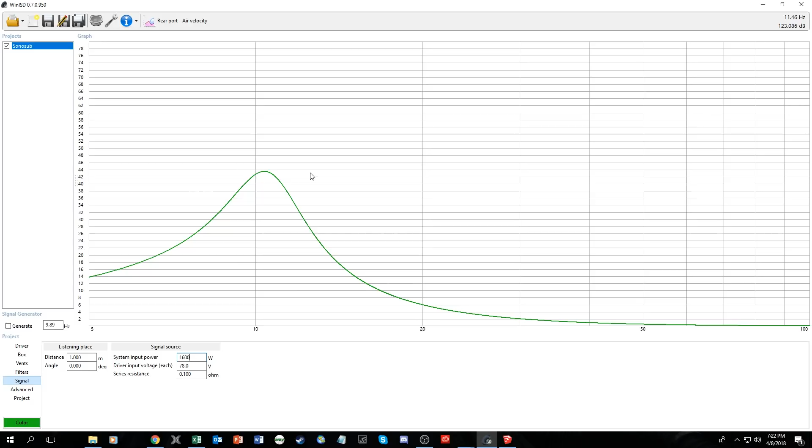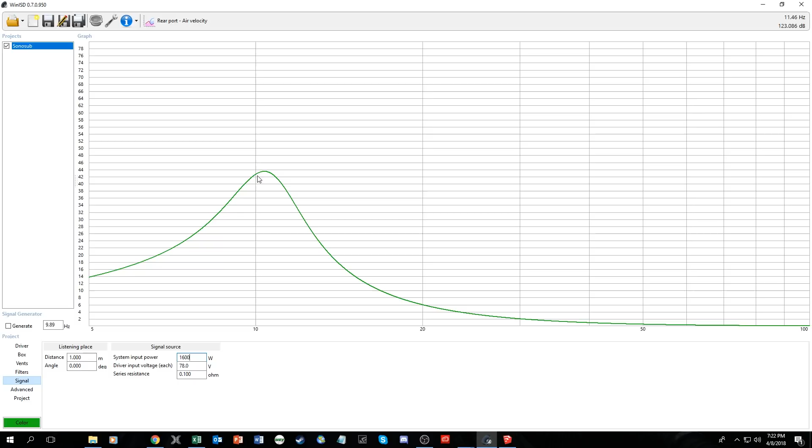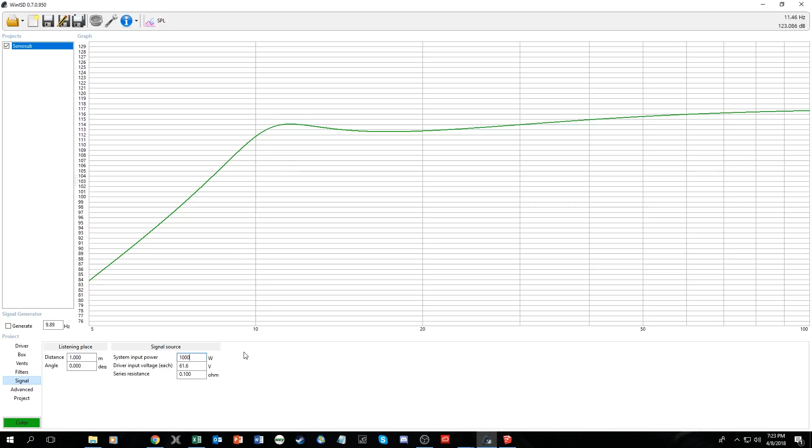I shouldn't experience any chuffing at that level. If I did put 1600 watts through it, the port velocity would be a little higher than ideal, but at that output level there's probably so much noise and room shaking that chuffing wouldn't be all that noticeable. If it does happen, I've done some things to mitigate it. I say I'm limiting it to 1000 watts, but I'll probably experiment, giving it more power and seeing how it works in the system, since that gives about 3 dB more output. It's something I can experiment with if and when I build these.

In order to build these, you need a product called Sonotube, which is concrete forms. Normally Sonotube is used to build concrete columns - you set it up, put rebar in it, and pour concrete into it. But we can also use it for subwoofers.

The commercial concrete form comes in sizes like 30-inch, 28, 26, 24, and more. We can also use the 6 or 8-inch size depending on your tuning. I would use the 8-inch diameter along with the 30-inch diameter to build the Sonotube - the 8-inch would be the port, and the 30-inch would be the body of the Sonosub itself. Sonotube also makes a couple other types.

One is the finish-free type, but I'd recommend against this because it has a strip for removing it after the concrete hardens. I don't know if this could cause a weak spot, so we don't want the strip, plus it probably costs more. Instead I'd go with the commercial. They also make Sonotube round, which looks cheaper, but I'd have to see it firsthand since I'm not sure if it's thinner than the commercial. I'd probably stick with commercial, possibly get the round version, but I'd need to compare prices and availability.

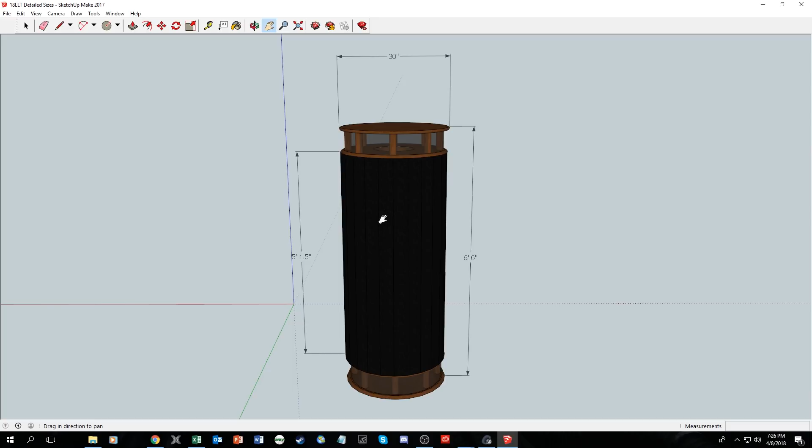This is my first initial design for the subwoofer, which I designed several years ago when living in Germany. I didn't build it like this at the time because I didn't speak good German and didn't think I could communicate to a German contractor exactly what I wanted with the concrete form tube, so I went with an MDF version instead. Now that I'm back in the States, I should be able to communicate easily enough and get it more readily available.

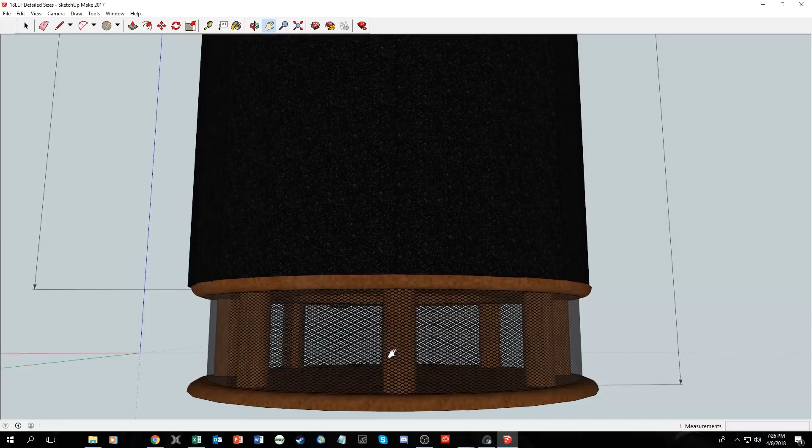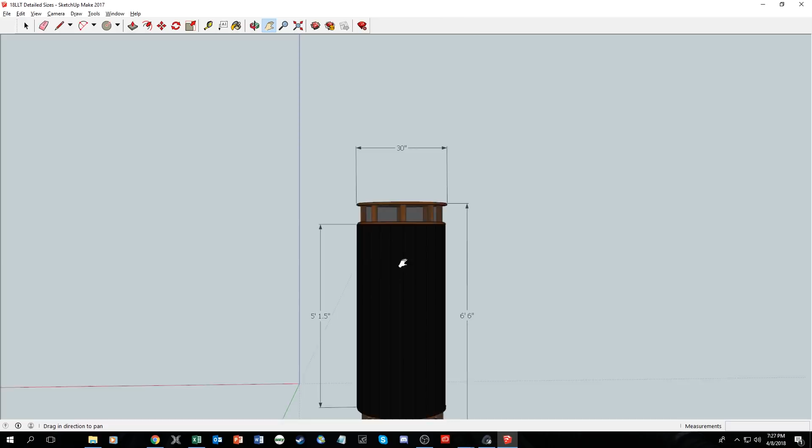The two main features of this design are screening material on the bottom and the top. This isn't necessary, but I have kids and don't want to risk a toy truck or something getting caught underneath, damaging the driver, or a ball getting into the top and inside there, requiring me to take it apart or potentially damage the driver that way too. So these grills are something I did want to have.

In making this video, I explored some other sizes, and came up with these other designs. The reason these get taller than the original is because with a smaller diameter, I need to maintain the same internal volume to get the tuning I want, so to keep the same volume, they need to be taller.

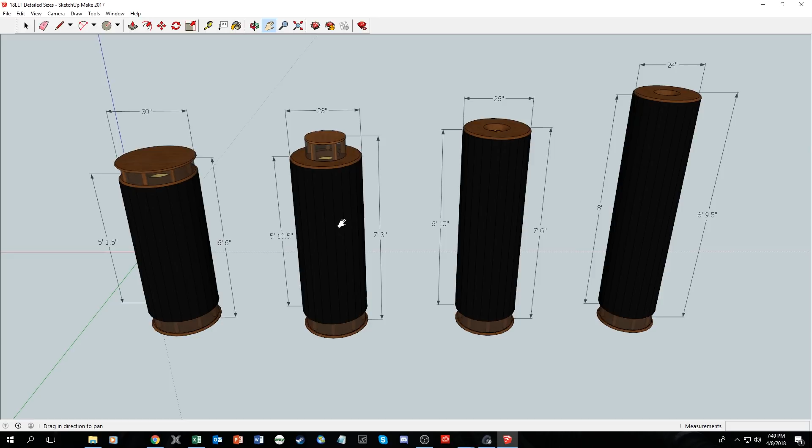The main benefit of these other three is that they use significantly less wood. For all the wood needed to build the original, I'd need 5 4x8 sheets of material, whether plywood or MDF. With these others, I only need 3 sheets, and could get away with just 2 sheets for this one. But there are major reasons why I can't build these.

The main reason is because they are too tall. The standard ceiling height in a lot of houses is 8 feet tall. This one is under 8 feet, but I can't put the top hat on there because it would make it too tall. And also, this one is just barely tall enough, for reasons I'm going to get into a little bit later.

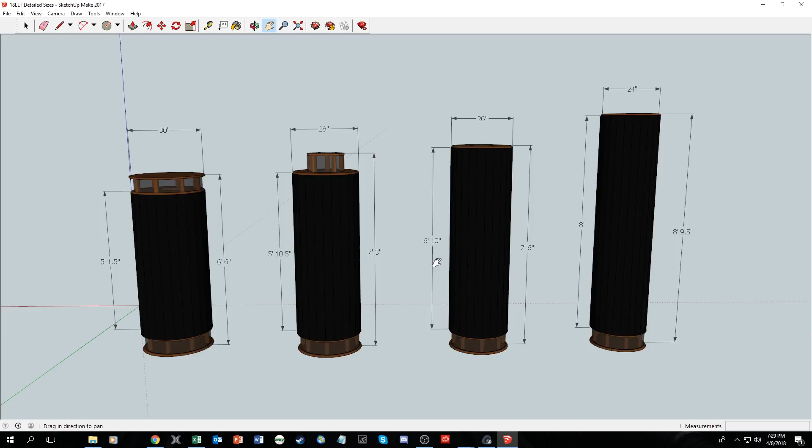When you tip this up on end, it actually is a little bit taller than 7 feet 6 inches. It's actually going to be 2 inches shy of 8 feet. So depending on how tightly the tolerances were in the house, if the ceiling actually is 96 inches, it might be 95 inches, and you might scrape the ceiling when you try to tip it up.

Another reason not to go with these taller sizes is because Sonotube comes in 12 or 20 foot sections. With this one, since it's only 5 feet 10.5 inches, I can get 2 of these out of just one 12-foot roll of Sonotube. I can just cut it in half and have 2 of these.

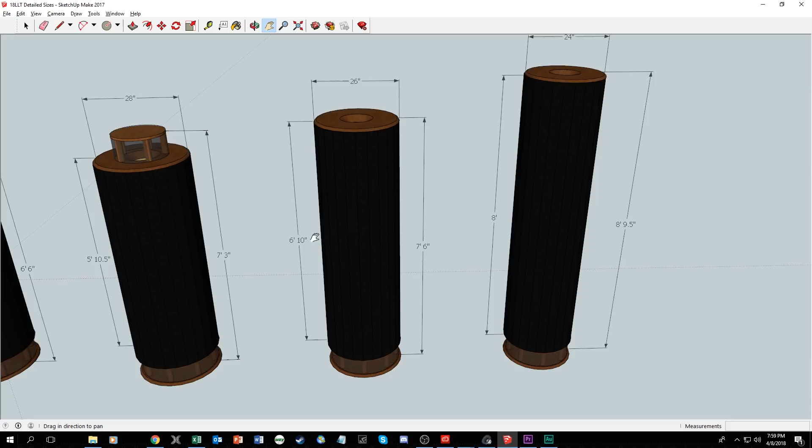If I, or someone else, was to go with one of these designs that has 6 feet 10 inches, then you either need to buy the 20-foot Sonotube section, or you'd have to buy 2 of the 12-foot sections and have a whole bunch of waste.

Looking at the price of Sonotube from one site, their 30-inch product costs $193 per roll. So if you go just a little bit over and have to purchase a second one, that's almost $200 extra you have to pay, plus the shipping, or however you plan to get it back home.

I'll show you some of the internal workings of this real quick. Inside we have, of course, the base plate. Then we have 2 pieces of wood where the driver will actually mount.

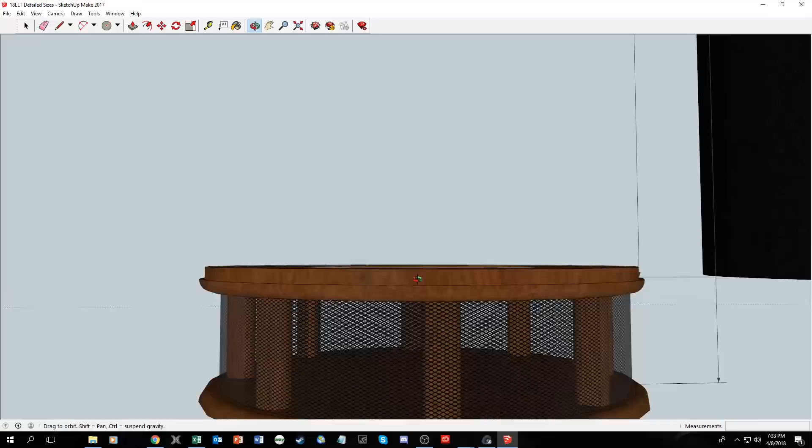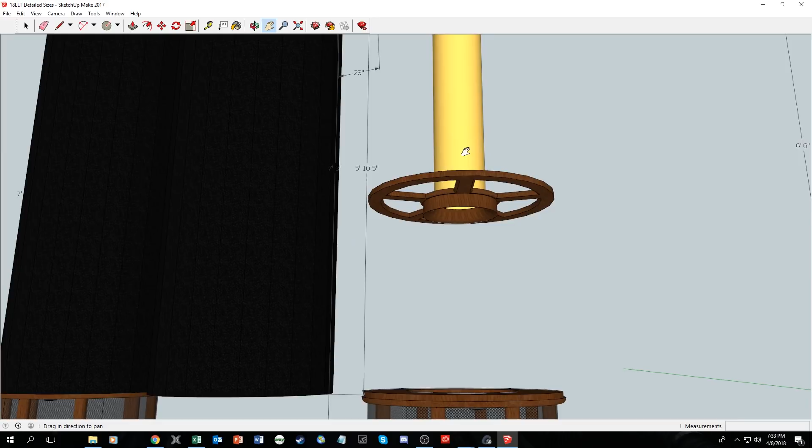I also modeled the Neutrik Speakon connector that I would be using a while ago. But then we have the driver. There is an internal brace here. It doesn't really require bracing, but the reason I have a brace on this one is because when I move, I want to make sure this can take a few hard knocks without this port breaking loose. So I have this one brace down here just to make sure this stays nice and stiff and doesn't move anywhere, especially since it's going to have this flange on it.

Speaking of the flange here, I have a flared flange on the end of the port, both on the bottom and on the top. What that flange does for me is it helps reduce the chance that chuffing is going to happen. It reduces the turbulence of the air so that I can have a little bit more air velocity before I have to start worrying about chuffing.

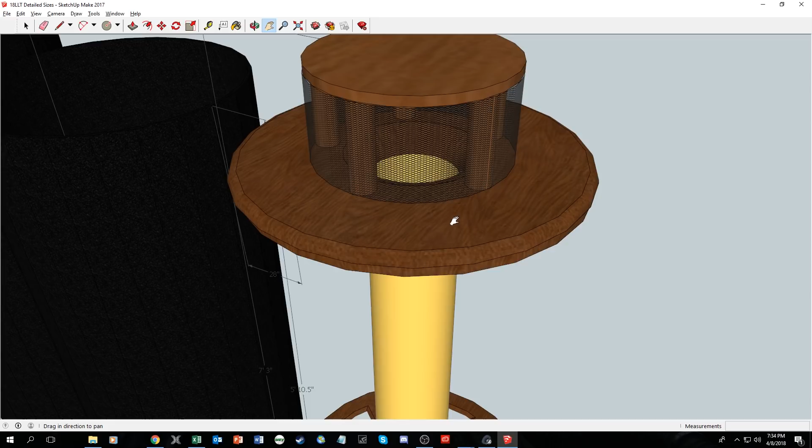The other main difference you'll notice is that this top hat here, well, I guess it looks more like a top hat, but it's smaller. There's a reason for that, based on the wood product I'd be using.

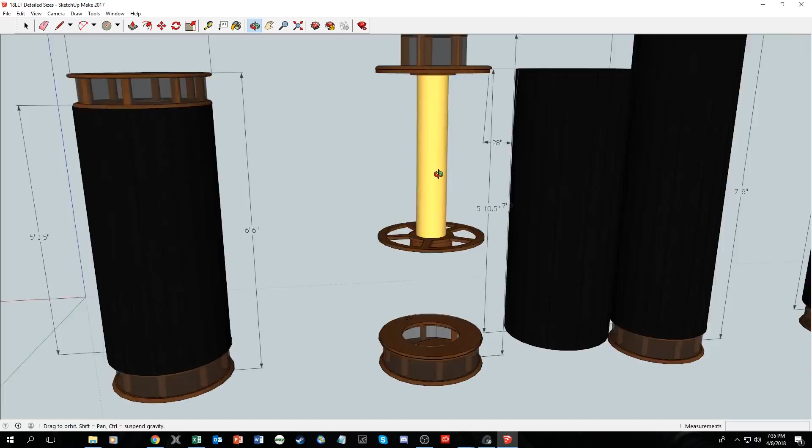So what we're going to have here is 1, 2, 3, 4, 5, 6 big circles, and then one smaller circle is going to be cut out. Plus, I'm going to need a few more circles cut out so I can do these flared end ports. One of the main reasons I went with the other, slightly smaller design is because of the wood.

This is the wood that would be required to do the 30-inch design, and as you can see, I need 5 4x8 sheets of material, whether it's plywood or MDF. What I discovered is that if I reduce the diameter a little, even just by 2 inches, I was able to fit on a 4th cutout here.

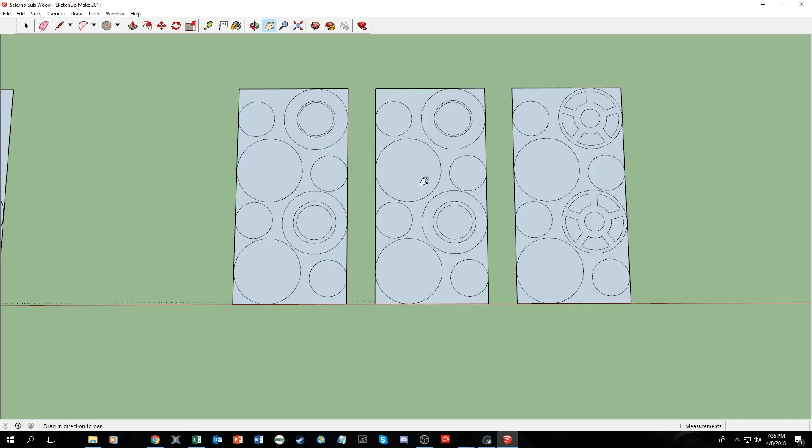This is a more detailed cut sheet I did of the wood. You'll notice there are gaps here. The reason for the gaps is because when I route this out with a circle jig and a router, the bit is about 3/4 inch in diameter. So I have to account for that and leave space so I actually have enough wood once I get these cut out.

So these are the cut sheets I came up with, where we have the base plates, the plates the speaker is going to mount to, and the top plates, and then we have the internal bracing, and then smaller circles that are going to be used to basically round out the flanges for the ends of the port.

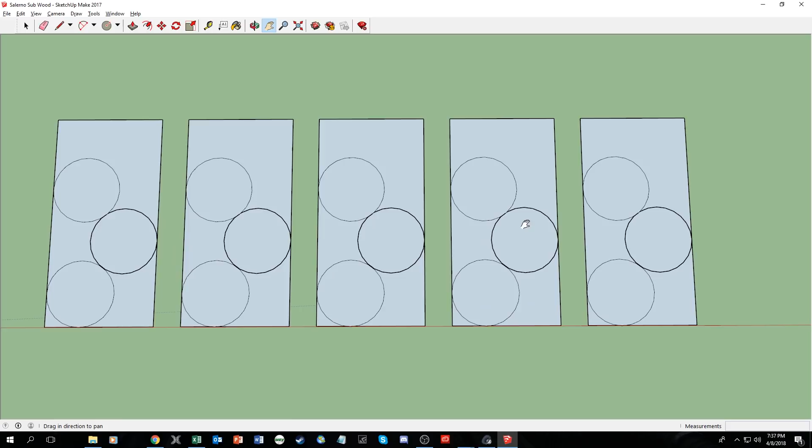You can see here that I was able to get everything I need on just 3 sheets of material, as opposed to needing 5 sheets of material. So there is a bit of a cost benefit there in doing that.

Now with the taller ones, I could get it down to 2 sheets of material possibly, but because it's too tall, that's not going to work for me. Maybe if you live in a house that has greater than 8-foot ceilings, you might be able to go with something like that if you did want to do this.

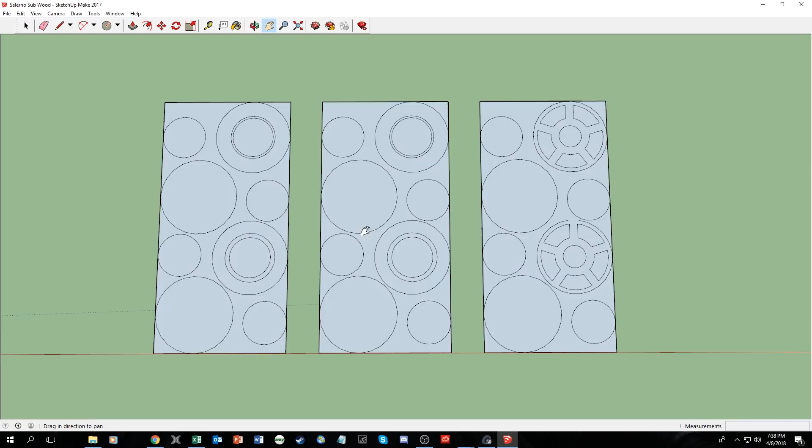But it looks like 28 inches is going to be the optimal diameter for the tuning I'm looking for and for the height that I'm looking for.

And so here's what they would look like inside the theater. These look like they're a pretty good height. They're going to fit and everything like that. And it'll look really nice behind.

Well, I guess it won't look really nice because I have a false wall here, but they would look really nice if I did have them outside, because I also plan to put a black indoor-outdoor carpet around them so that they look a little bit better than just the exposed bare sonotube.

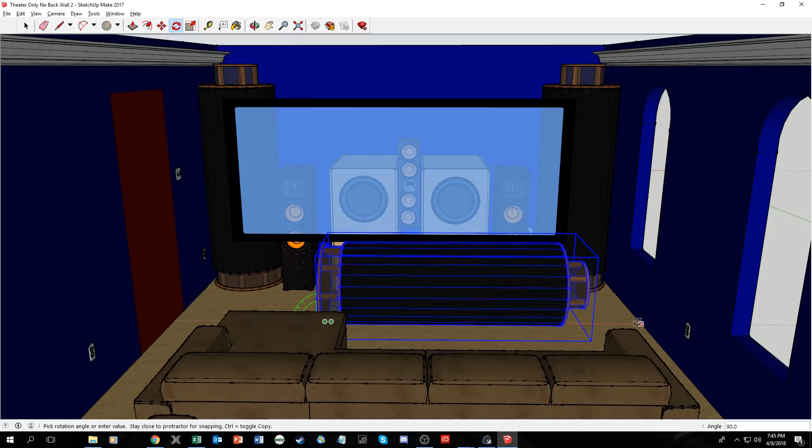Now, in relation to height, you have to remember that one thing you have to do is stand this thing up. And what's going to happen is this thing's going to be a little bit taller when it's almost all the way up - when it's about this far diagonal - than it is when it's just sitting on its base. So you need to take that into account when designing something like this.

Otherwise, you might scrape your ceiling, or even worse, the ceiling's so low that not only are you going to scrape your ceiling, but you're not even going to be able to get it upright after you've already scraped it. And you're going to be stuck trying to figure out how the heck do I stand this thing up on end because I made it too tall?

So you want to keep that in mind if you do design a Sonosub like this, to make sure that it is going to be able to fit not only after it's placed, but also when you're trying to stand it up. Make sure it's not going to scrape against the bottom of the ceiling.

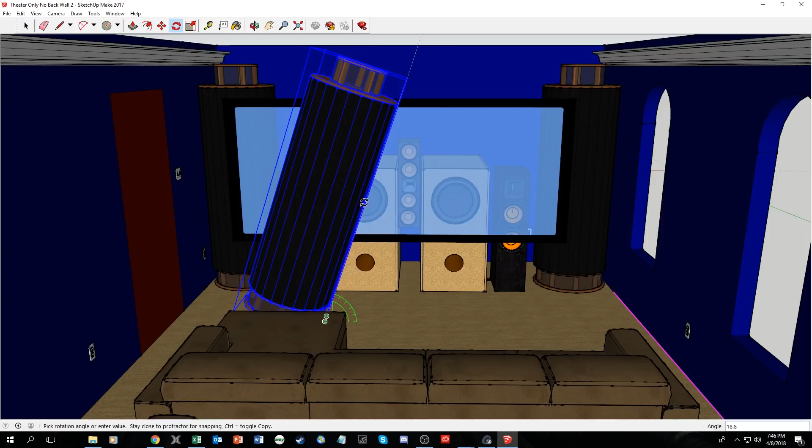So there it is. There's my design for the Sonosub with an 11 Hz tuning point using an 18-inch driver. Now, this is a project I'd like to do, but the next major thing I plan to do at the home theater is buy a new projector.

What I plan to get is the JVC X790, or whichever is the equivalent by the time I'm ready to buy. And then after that, I'll look at either getting Atmos speakers or new subwoofers.

Really, my funding for that right now is just - we do have a budget in our family, and we try very hard not to buy stuff on credit, so I'm not buying any of this on credit. So I'm just saving up extra money I have, and a large source of that extra money is actually coming from this YouTube channel.

So if you do want to see build videos, of course I'll do a review of the JVC projector. I'll do build videos of these subwoofers most certainly, and I'd also do build videos of putting in Atmos and stuff like that.

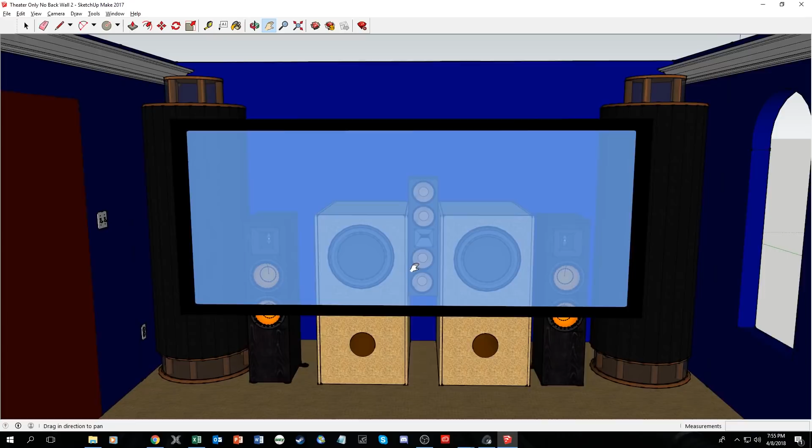But there it is. There's the design for the Salerno Subwoofer with the Sonotube format.